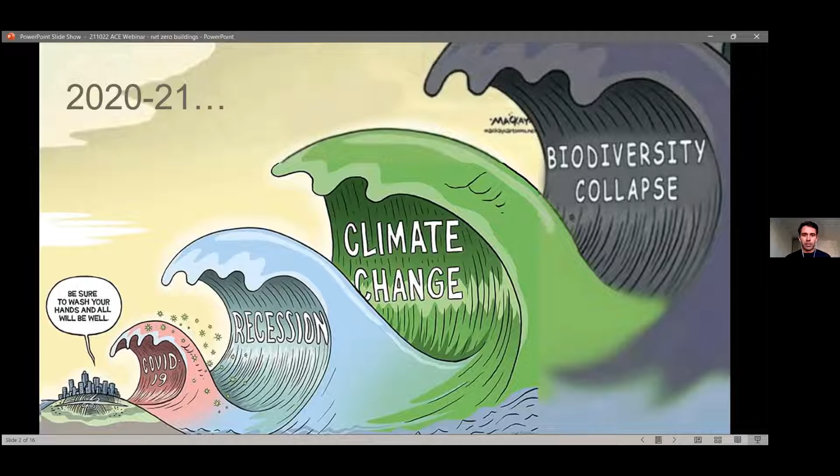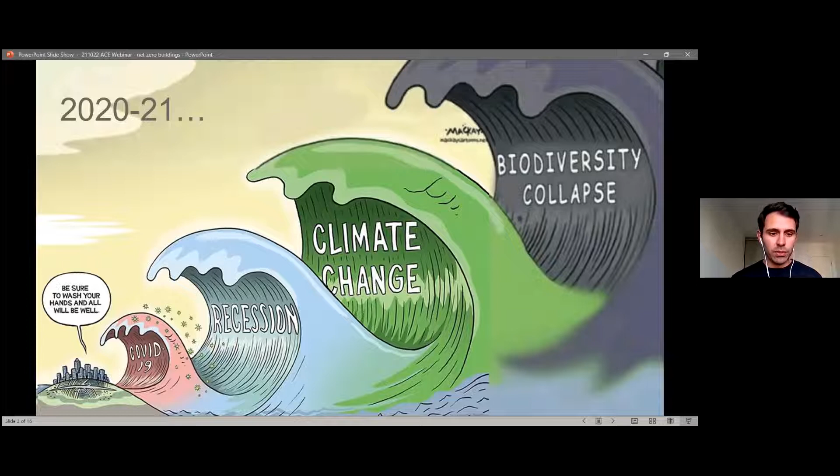Just in terms of context setting, I think this slide is really quite impactful. It shows today's context - we've all been very worried and taking rapid, worldwide action on addressing the effects of COVID-19. But similar crises lurk in the background, and the climate crisis is one of those. We need a similar level of pace and scale of action to what happened with COVID, in fact maybe even more so. There are lots of similarities we can draw from what's happened in the last 18 months to what needs to happen in addressing the climate crisis.

So exactly what needs to happen is shown on this slide. The IPCC reports have told us time and time again that we need to achieve net zero emissions by mid-century - this bottom purple line - and critically, we need to halve emissions by 2030. So within the next 7 or so years, we need to drastically reduce global greenhouse gas emissions. Currently we're tracking on an upward trajectory, looking to hit a warming scenario of greater than 4 degrees by the end of the century, which will spell disastrous effects of climate change.

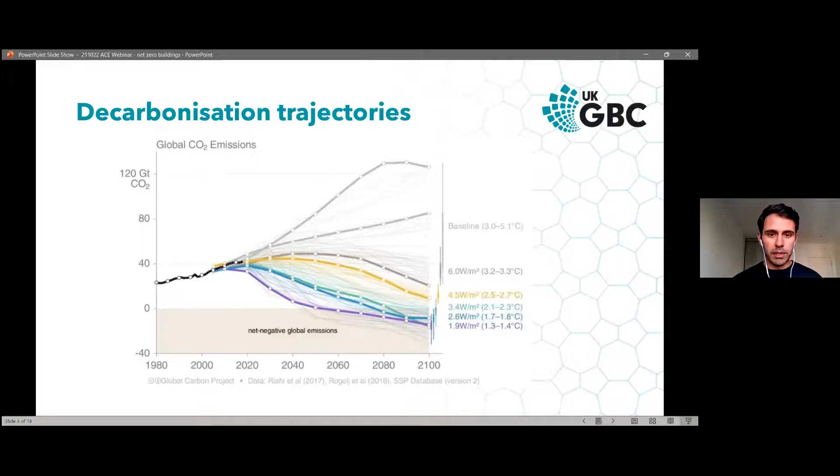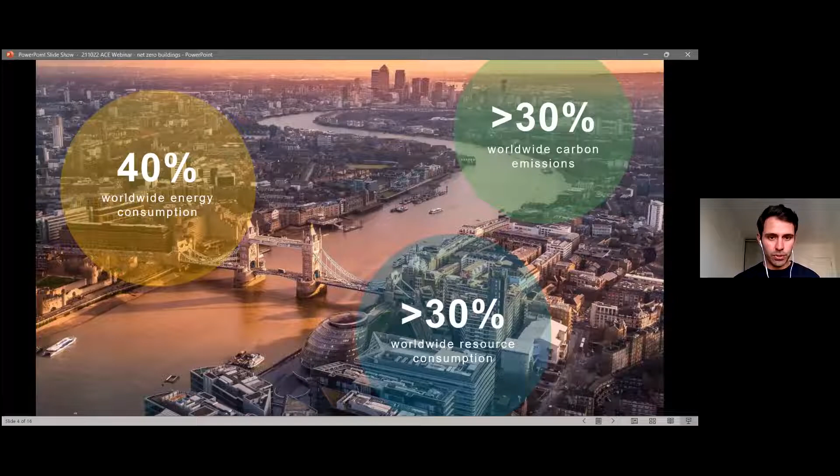Relating this to our profession in the built environment, these are some commonly used stats. In fact, the stat we like to use is that the built environment is responsible for about 40% of global greenhouse gas emissions. So there's a significant impact that the built environment has, and it's a key part of the solution in delivering against that net zero target.

Just in terms of setting that backdrop and making it relevant to the building sector, what we're doing in the Advancing Net Zero team is taking these high-level aims - taking the findings from the IPCC reports, understanding what the UK government is doing, setting a 68% reduction by 2030, which is good to see. Understanding how that relates to the property and construction sector, relating it to carbon budgets, understanding what role businesses have to play, and then how that relates to the component part of buildings.

So our work spans some of those levels - importantly the whole life carbon roadmap, which Iria mentioned and which I'm going to talk about, and then getting businesses to commit to net zero carbon buildings and also a net zero framework. So I'm going to talk about the roadmap and the framework in the next 5 or so minutes.

So the Whole Life Carbon Roadmap, we brought together a range of industry experts. UKGBC represents the entire breadth of the construction and property value chain, and we intended to produce two key outputs.

The first is a science-based trajectory to understand exactly what it's going to take from the building sector to achieve the UK's net zero target. So essentially taking the Committee on Climate Change carbon budgets, relating that to the building sector, understanding how much we have left, and then apportioning that out across the different sectors, for example understanding how much the residential sector has remaining.

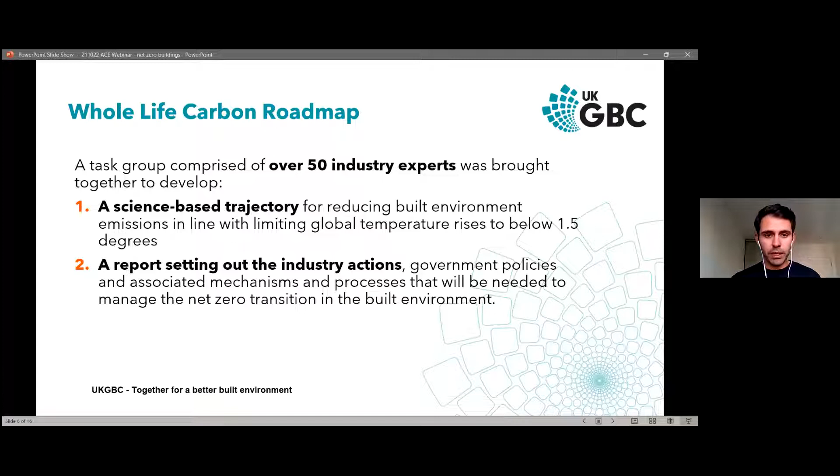Non-residential, offices, industrial, etc. Following on from that, we also know that there's going to be a steep level of reductions required from the industry. So we've set out a report which identifies the key industry actions and government policies that will be needed to ensure we're on track to delivering against those trajectories.

Just to give you a sample of what that looks like, the building sector has been reducing its overall greenhouse gas impact, but there's still some way to go. At the bottom of the chart in green, you can see the operational energy usage of domestic and non-domestic buildings. Our housing stock is the lion's share of that, so lots to do on the residential sector and importantly retrofit.

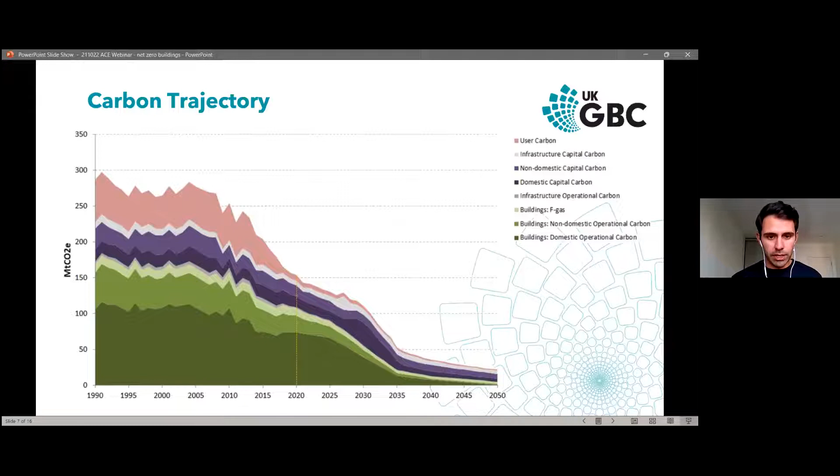Looking at infrastructure, that's a small sliver in grey. And then looking at capital carbon, which is everything to do with the embodied carbon related to the construction products and materials used in our sector, this will set out exactly what needs to happen in terms of high-level targets and how that can be related to building-level performance targets.

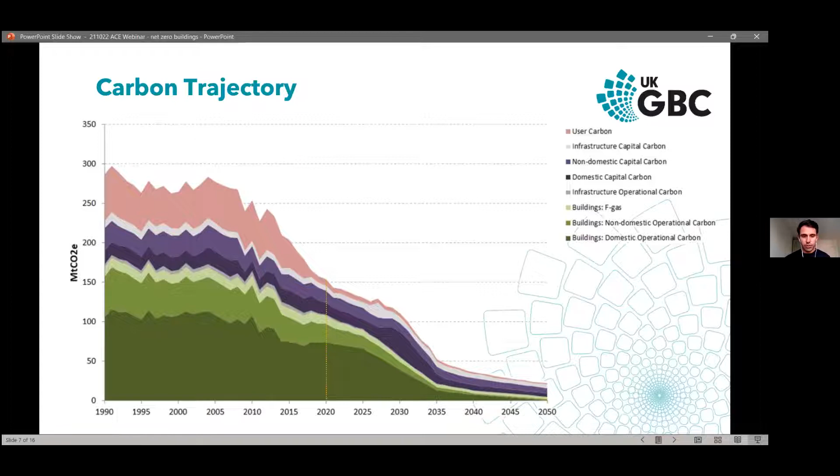And then on the actual doing part, we will have a series of policy and stakeholder action plans. This is just a snapshot of what that will look like. We have central government recommendations across a 2025 and 2030 timeframe, and then we break that down even further to make it more relevant to specific stakeholders, for example investors, developers, facilities managers, and contractors. There will be recommendations in there for building services engineers and structural engineers also.

So I've got 6 minutes on the clock. I was told we've got about 7 to 10 minutes. So I'm going to spend another 2 or 3 minutes on the net zero carbon buildings framework.

So essentially that's the roadmap, which is the sector-level trajectories and actions that need to take place. The framework definition is something we produced a couple of years ago to try and instill action today on delivering net zero carbon buildings. Essentially, there was a lot of confusion in the industry around what net zero means and how that relates to buildings.

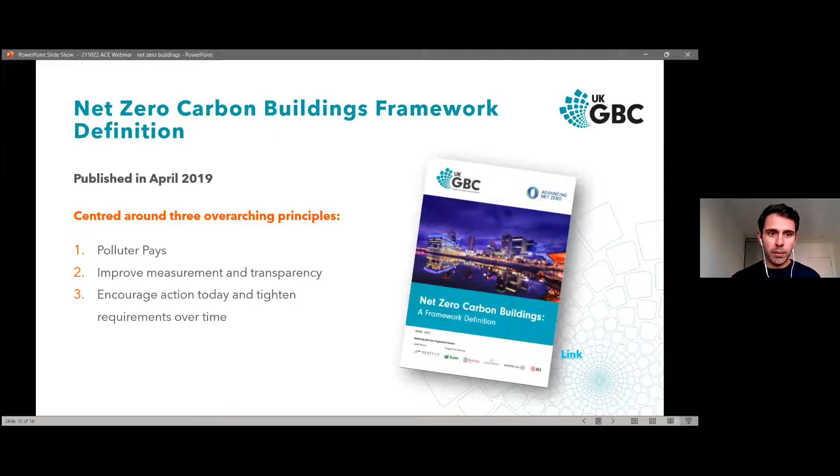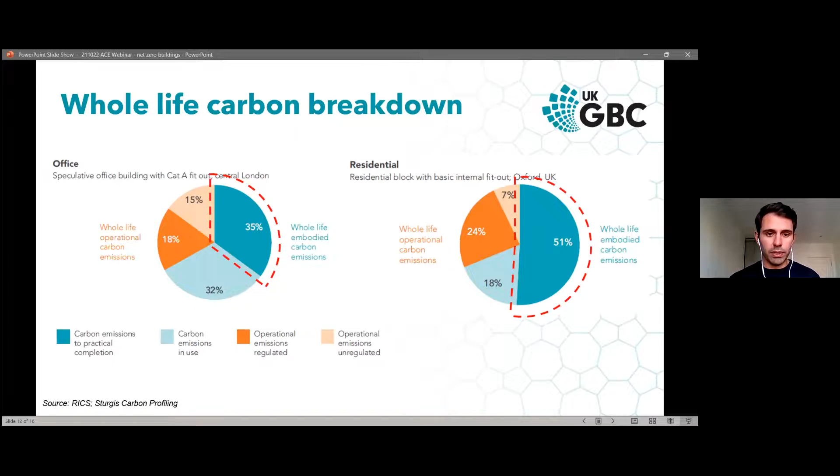We do understand that we need to move to a whole life carbon approach. However, that wasn't considered feasible or practical today. So we feel like these are the two priority scopes of carbon that we need to tackle today.

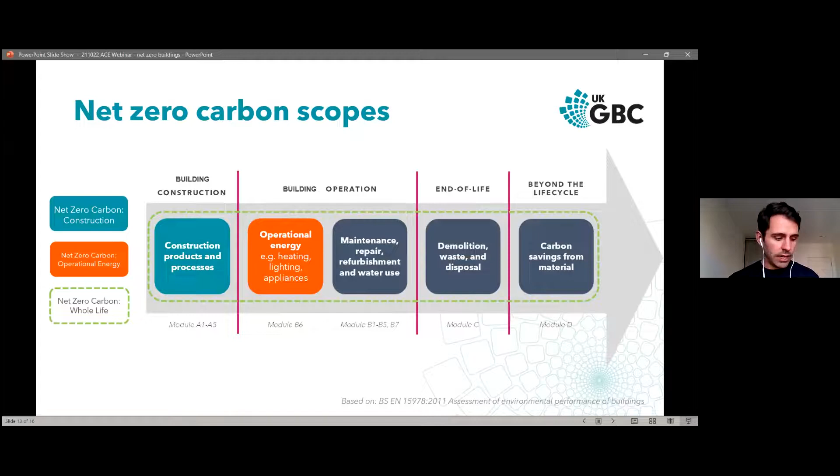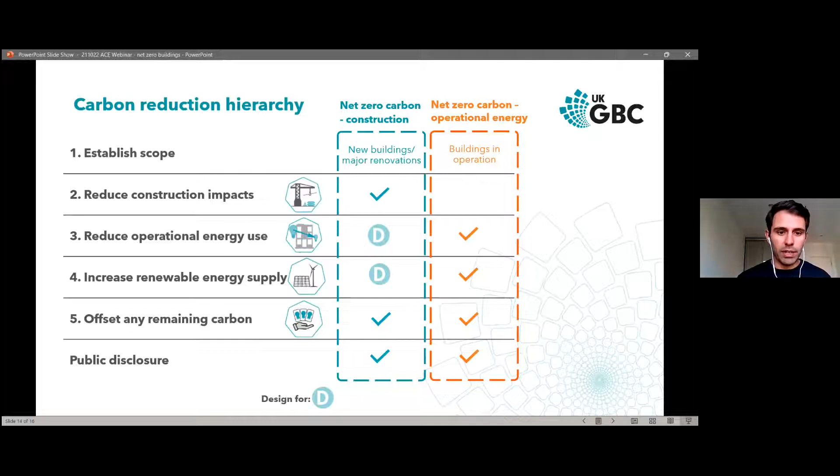And offsetting that carbon in full to achieve a net zero carbon balance. For buildings in operation, embodied carbon is less important, so the priority measure there is to reduce operational energy use, move to 100% renewable energy supply, offset any carbon if needed on a 12-month basis, and then publicly disclose against that.

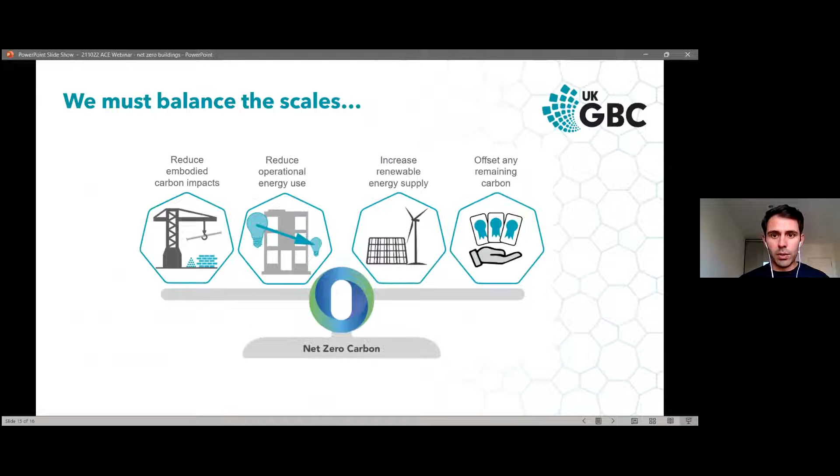In summary, this is what we need to do to achieve net zero carbon buildings. We need to reduce everything that's on the left-hand side of the scale, and we need to increase everything that's on the right-hand side of the scale, obviously with a decreasing reliance on offsets.

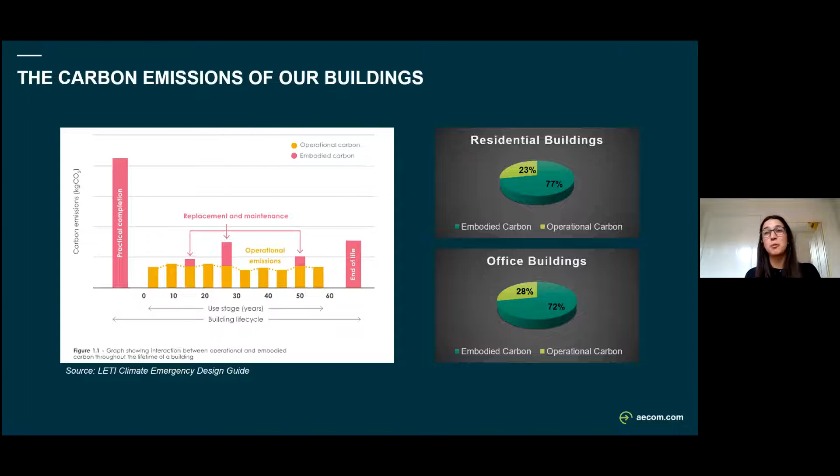So what we can actually see on this graph, which compares the embodied versus operational carbon emissions throughout the building life, is that nearly half of the carbon emissions are emitted at the very start—pretty much before the building even opens. This is all due to the actual making of the materials and the constructing of the buildings themselves.

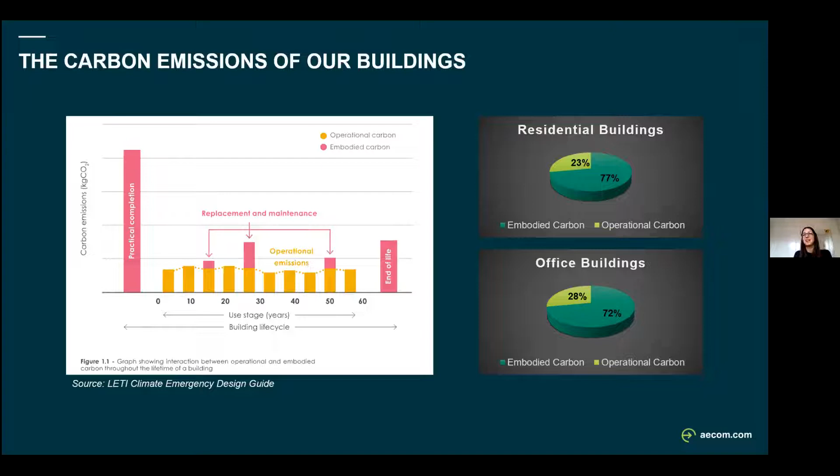This is really the big item, or the elephant in the room, which is not currently being regulated and we need to rapidly address, as Karl mentioned also. So it's a really big issue, and there's a fair few things we can do about this to start addressing it as quickly as possible.

Within AECOM, we've developed a 6-step approach to reducing the carbon implicit in our designs, starting with refurbishment. The best way to reduce the carbon emissions of new construction is to just try not to build new in the first place, and encourage saving the buildings that currently exist in the world around us.

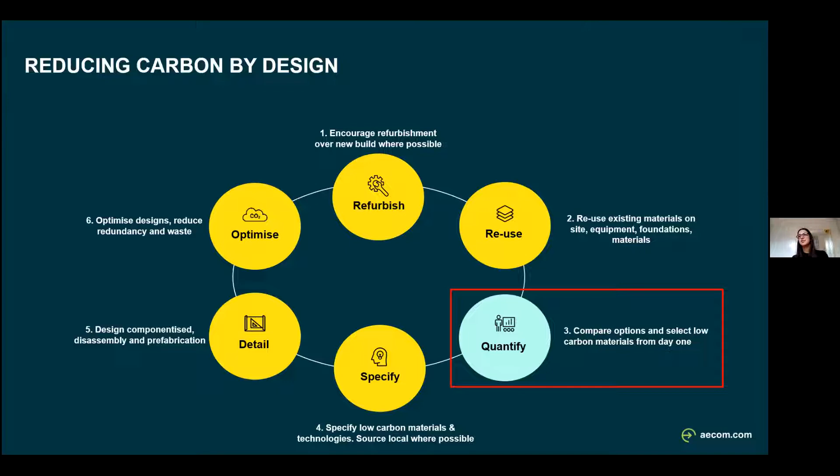Step 2 is reusing, so we're looking at encouraging reuse of as much of the existing material on site as possible. Step 3 then comes in—this is a scenario where we have to build new, when there's no other option, and this is where we're looking at estimating and calculating the embodied carbon emissions of our schemes at day one.

This is actually the significant step in the uniqueness of AECOM's approach to quantifying embodied carbon, and this is where our tool comes into place, which I'm going to talk about in just a moment in more detail.

Our step 4 is specify. So we're looking at specifying and promoting the use of low carbon materials and low carbon technologies, but also quite importantly, engaging with the supply chain early to make sure that those materials are actually going to be available when the building gets to go to site to get constructed.

Step 5 is detail. So we're looking at designing connections and element parts and components to enable them to get disassembled and reused at the end of the building life. And finally, last but not least, we're looking at optimizing our designs in an effort to reduce the material waste.

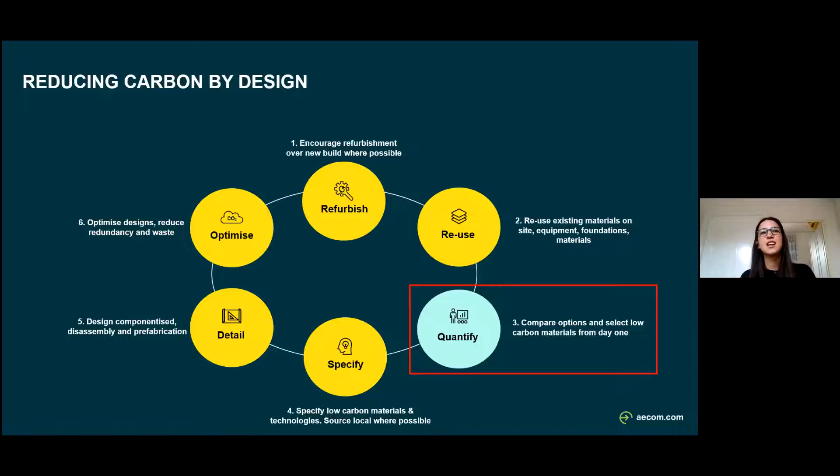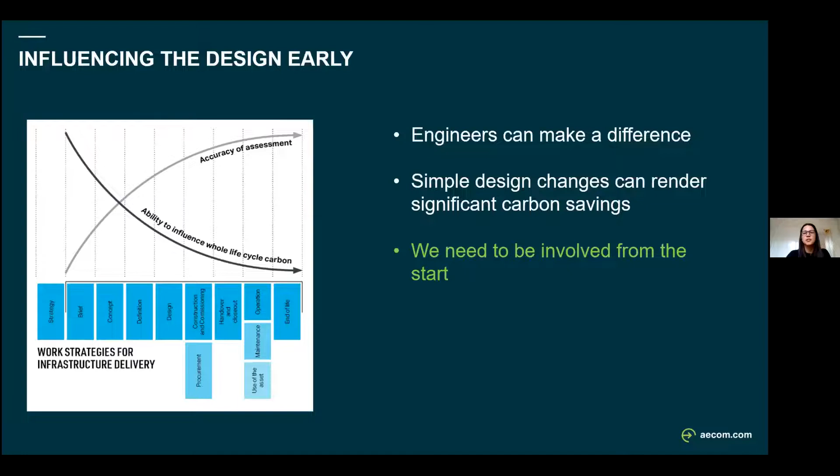Thinking of the project stages of how we work at the moment, this is currently roughly where engineers get involved. By the time we come in and sit at the table, most of the key decisions have already been made. Someone's decided whether they're going to build, what they're going to build, how big that building is going to be. Often the room layouts are decided as well. So actually, as structural engineers and mechanical engineers, it's very difficult to make any impact on the carbon footprint, because we're just trying to design our structures and services to fit within predefined constraints.

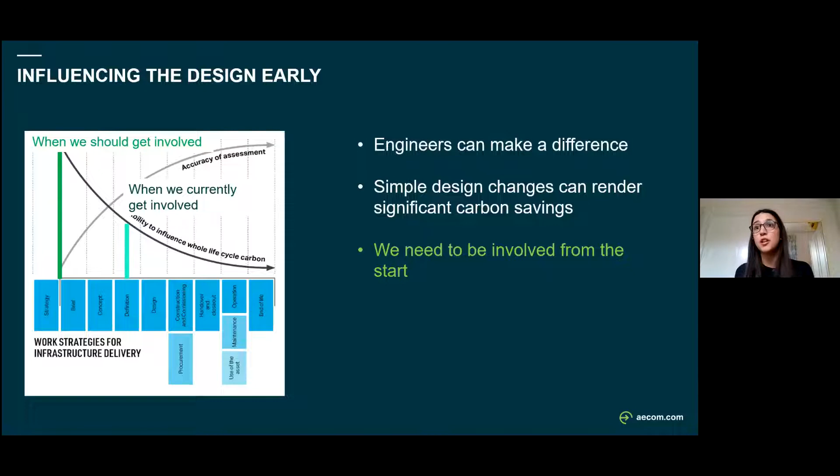So in order for us to actually make a real difference, this is where we need to get involved at the very, very early project stages, strategic briefing stages, where people are trying to decide whether the building that's on site can actually be saved, or if you need to build new, what can you build to make sure that the carbon footprint is as low as possible.

And this is actually where our embodied carbon tool comes into play. Within AECOM, we've developed our own in-house tool, which is called Eco.Zero. It's essentially an embodied carbon and cost optioneering tool. The idea is for this tool to be used exactly at those early project stages.

We're talking RIBA stages 0 and 1. The idea is that the tool can help define the building shape, the building form, can help define the size of the building and the key materials, with carbon at heart basically.

So what we do is we've collaborated across multiple disciplines, because we appreciate that we really need to look at holistic carbon assessments. We can't just focus purely on the structure. Obviously, a big element is the structure, but in addition to that, we have geotechnics, input from our own facades, architecture, and cost management team in order to offer this holistic view.

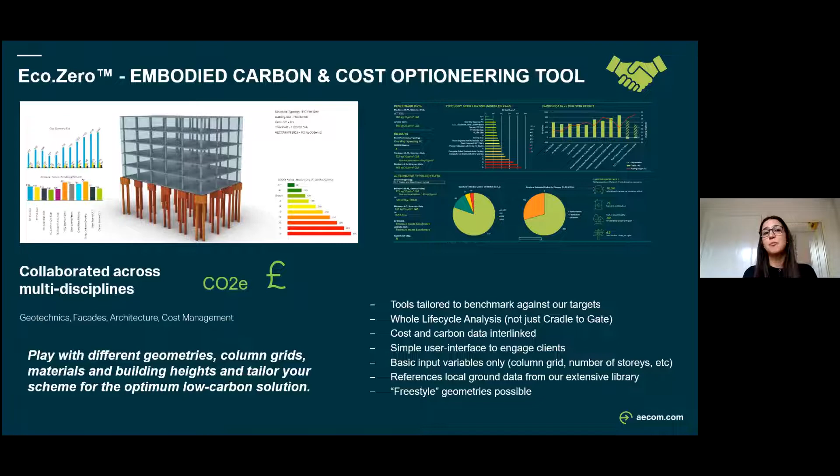The tool is currently offering at a glance carbon comparison of 11 different structural typologies. We're looking at multiple concrete options, multiple steel options, timber, and some hybrid options as well. Really the idea is that you can play with different geometries, different column grids, different materials, so that you can tailor your scheme for the most optimum carbon solution.

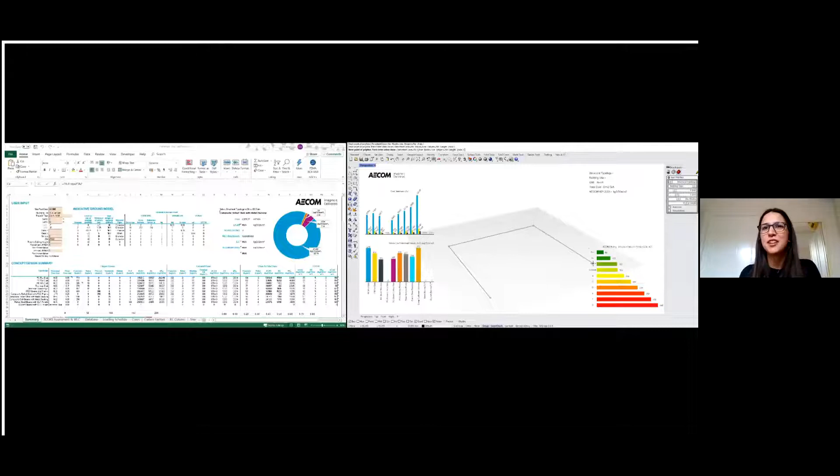Next, I've got a little video to show how the tool works in practice. Brilliant that it works. So all you need to do to get it going is draw an outline of a building, and then immediately a building pops up in front of you. The idea, as I said, is to use this as a decision maker tool to choose the best material, the best building shape.

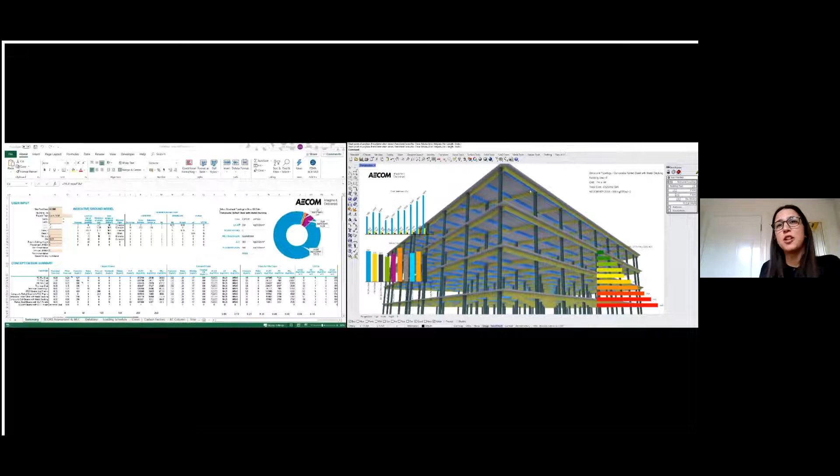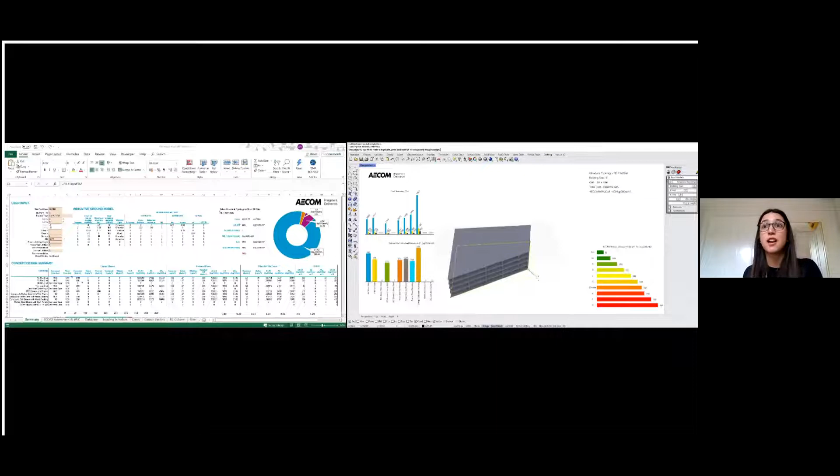What the tool does essentially, when you change some of the key metrics, you can play around between different materials. You can change the spacing between the columns, for example. Whenever you change something, the data in front of you gets updated live, as it draws information from our own extensive database. So, for example, when you change the column grids, the sizes and the slab thickness of the building change live in front of you, and the associated material tonnage and carbon also change.

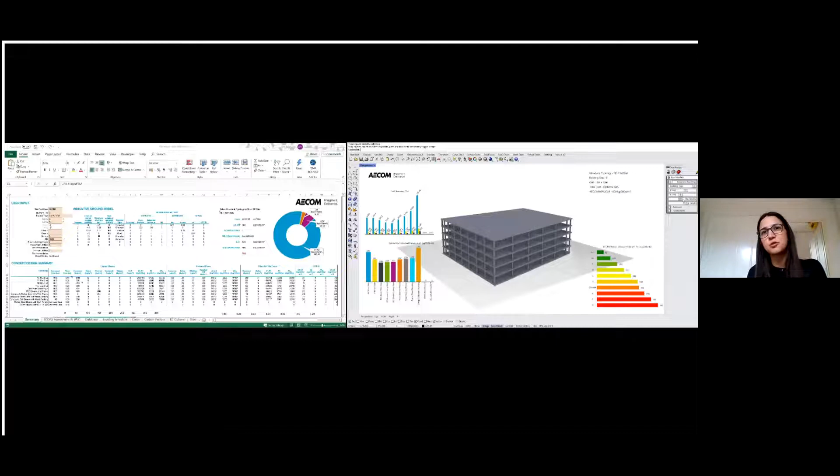You could play around with different options, add stories, subtract stories, and see what effect that has on the overall carbon and where that sits in terms of our benchmarks.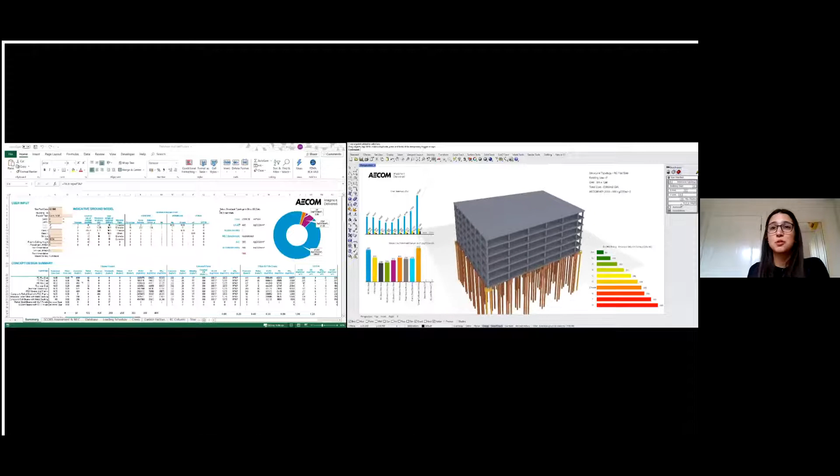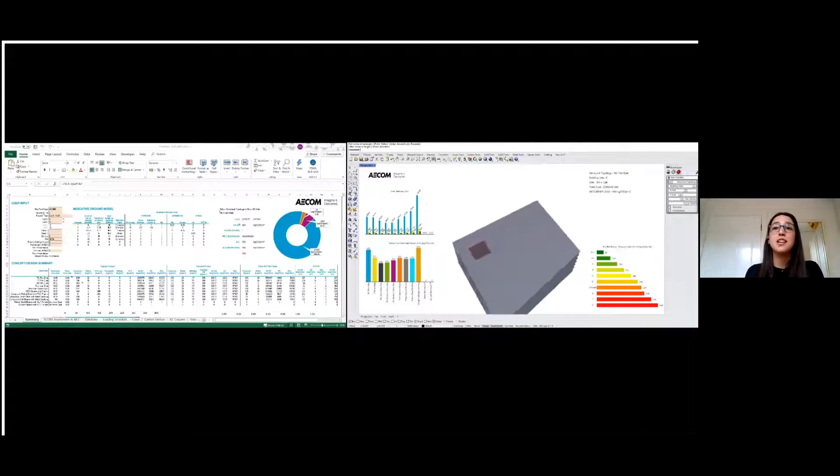As I said, we've developed this as a multidisciplinary tool as well. We are looking at foundations. For each of the 11 structural typologies, we generate a different foundation solution tailored specifically for the site we're looking at. All the input it needs is a simple ground model, which you could get from any BGS borehole logs, which exist for nearly any part of the country. So it's not too difficult to do.

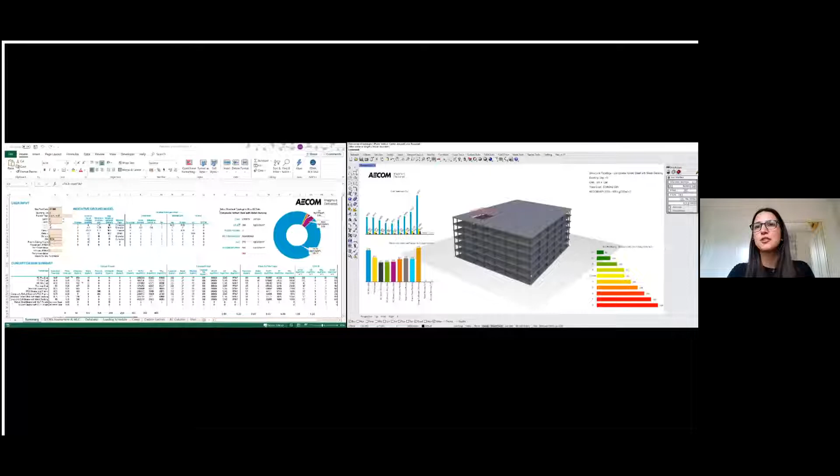So that's it on the tool. I think this is probably the end of the video, so I'm just going to move on to the next slide, conscious of time.

From using our tool, we've already started to establish some key trends and simple steps we can take to achieve low carbon construction. I've extracted some highlights here, but the list is much longer. I just don't have enough time to tell you every bit.

Some of the highlights we've got is that increasing column spacing actually results in an exponential rise in embodied carbon. So we're trying to promote using regular grids and closer column spacings.

Another interesting study we did a couple of months ago was on structure versus facade carbon. This is essentially a study we did to try and highlight the importance of doing holistic assessments. Because sometimes if you do an embodied carbon assessment purely looking at the structure, almost always the timber option is going to come out as the winner.

But something people sometimes don't appreciate is that the cost of using timber is mostly that it comes at deeper sections, which ends up increasing the depth of the structural zone.

So if you look at a longer spanning solution in a multi-story building, the little bit extra you get at every floor when compared against a concrete solution could amount to quite a lot. So if you compare the different overall building heights between a concrete solution and a timber solution, it could be a difference of a few meters, which is not insignificant at all.

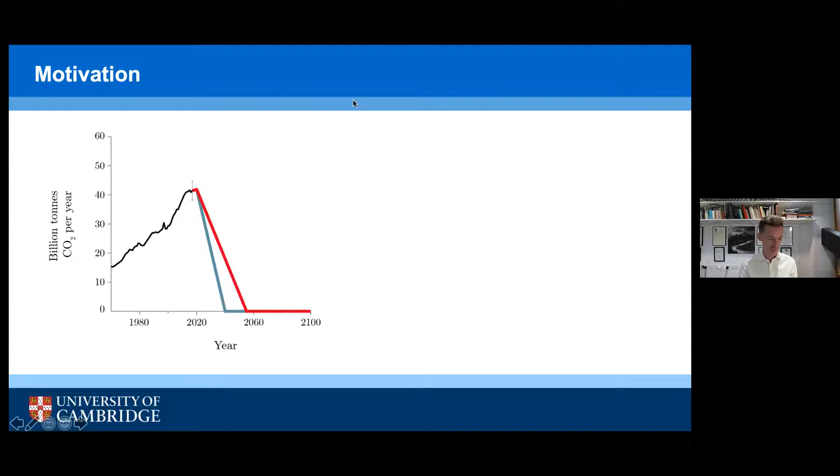I just wanted to show one graph to recap essentially what Karl said, to highlight why this is important. This is CO2 emissions globally from 1970 to 2020. The red and blue lines are the projections from the IPCC that will give us a chance of getting to 1.5 degrees warming. So we've all been educated and worked on that upslope. Whilst there are very good examples of low carbon design, generally speaking, CO2 emissions have been going up.

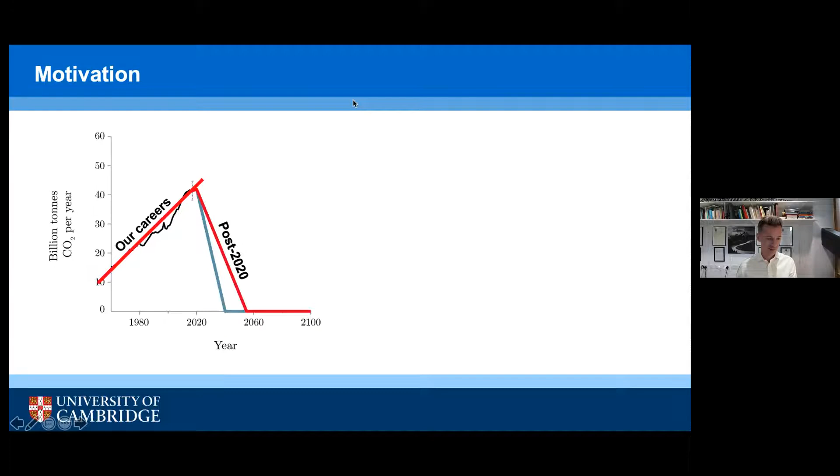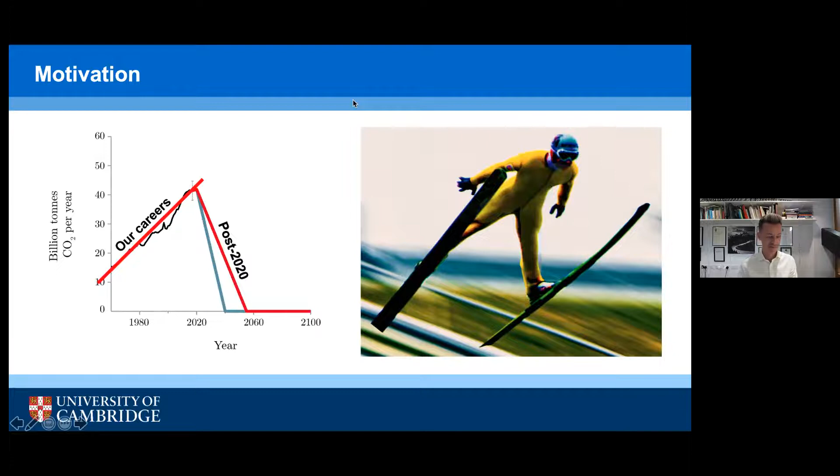On that graph, for me, it's like a bit of a ski jump leaping off after 2020. It's a pretty big challenge is really what this graph is telling us. What we're going to look at in a few moments is changing completely the way that we design things. I think the previous practices we've had have demonstrably not been good for the climate. So although that looks like a very scary slide, we need to reduce our emissions every year between now and 2050. I think it's a really big opportunity for us to do things in a much better way. So it's an exciting time rather than being a really terrifying time.

So our motivation, in response to that challenge, is really to think differently about how we use materials in construction. Do we know how much material we need? Does it perform as we expected it to? And as we start to change our practices, do unexpected things happen? And then how do we deal with that?

In our hierarchy of things to do as we move towards net zero, using less stuff is the first thing to do. So just use less. You can then deal with your specifications, and very much the last thing is you can offset, and offset appropriately. Offsetting is not the answer. Using less stuff is the answer.

So every sector of our economy has to change, of course. This is not just construction, it's everybody. So we all have a responsibility.

Really what we're going to talk about here is the importance of measuring what's going on. If we want to use less material, we really need to know how our structures are performing. So from a structural engineering perspective, we want to know things about serviceability performance, ultimate limit state performance. And from a carbon perspective, we really want to know what's in our building.

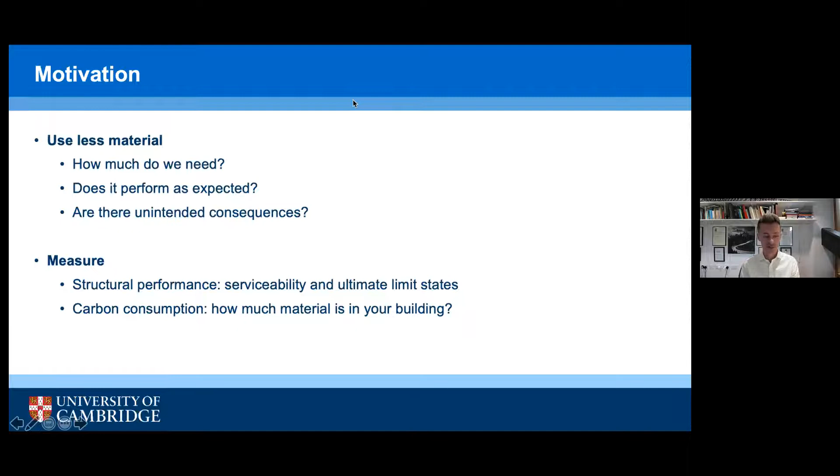Even something as simple as that is still relatively unknown. So if we first look at structural design behavior, this is a picture of a beam that was tested at the University of Toronto back in 2015. It's a 19-meter span beam, 4 meters deep.

What they did, which was very important, is they sent all these details around to anybody in the world who wanted to see it. Before they ran the test, they asked for predictions of how this beam would fail. It's a simply supported beam—this is very basic structure. What point load would cause failure?

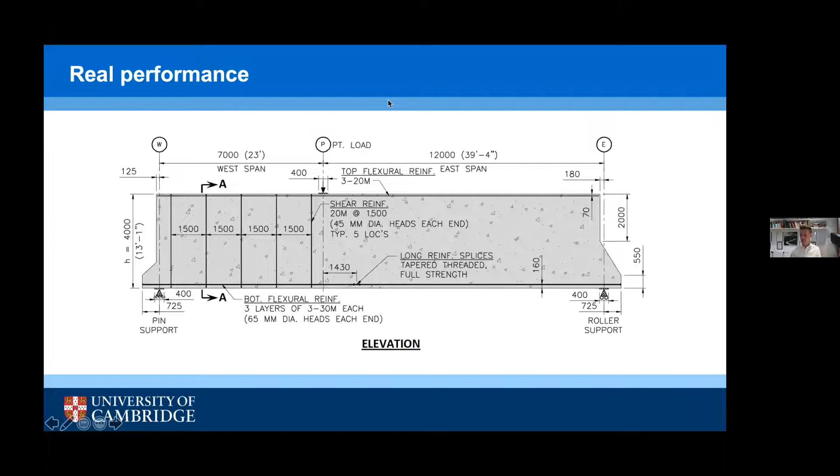The reason I'm putting this up here is a simply supported beam of this size is unusual in a testing environment—we don't often test beams this big, but it's not unusual in real life. So if we can't actually accurately assess or predict the capacity of a structure of this scale, then how on earth can we be confident about how things are working when we build them?

So one response might be, well, let's just be very conservative and use material as our risk mitigation. Unfortunately, that's not compatible with climate change. We can't do that. So we need to know how buildings work, how structures work, and then improve our design practice as a response to that.

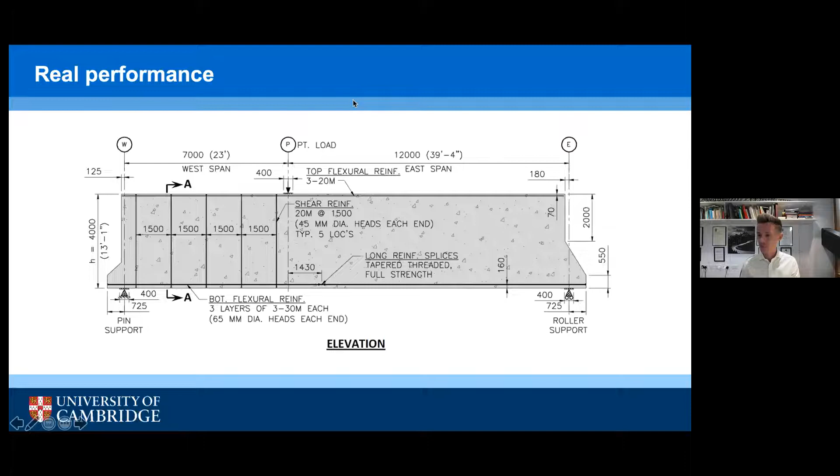So let's be honest about what we don't know and stop pretending that we know everything. So that's the structural side.

And then on the carbon side, we still have relatively little data about how much embodied carbon is in buildings. This is just one example from a US database of commercial offices. We've got 500 commercial structures here, and you can see the range is quite big. We've got a median of about 400, but all the way up to 2,700 kilos per square meter.

So when we come to look at embodied carbon, we really need to know what does good look like, what is the best practice in this field. And that really requires us all, either individually or as companies, to start sharing our information—sharing your design, sharing your carbon assessments, making sure we've measured in the same way.

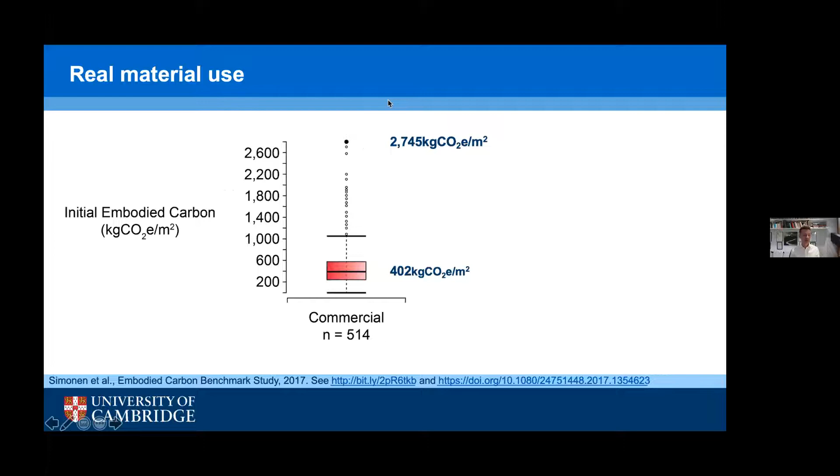This is a key point with embodied carbon. You can measure it in all sorts of different ways, and you can get all sorts of different numbers. Ultimately, for me, it doesn't really matter which method we choose, so long as we all choose the same one and then compare across companies, across sectors.

And it's only through doing that we're going to be able to learn at the speed that we need to learn to deal with the climate emergency.

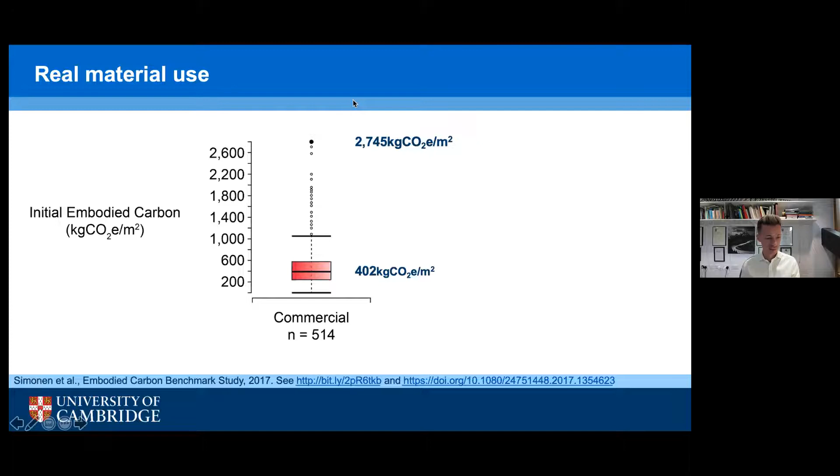And so what this really, for me, comes down to is just a quote from a nice poem, really to embrace the idea about getting things wrong. And that's something that's really foreign to many people—getting things wrong is viewed as being a bad thing.

But as you make mistakes, as you have an error, you learn something. And as you make more mistakes, you learn more and more. So this is the quote here. We need to get onto that road of understanding how things really work, where the carbon really is, and collectively move towards a lower carbon design.

So what that means is this virtuous circle of designing, analyzing, building, measuring, and improving.

The reality of most design is you send your drawings off, the building's constructed, and you never go back and check, is my finite element model actually correct? Because first of all you probably won't be paid for it, but also you don't perhaps want to know if your model was correct. But if we can close that loop, we have a better chance of improving our design practice. And then in the center of our circle, we've got those three key things: zero carbon, resilience for infrastructure and buildings, and being resource efficient.

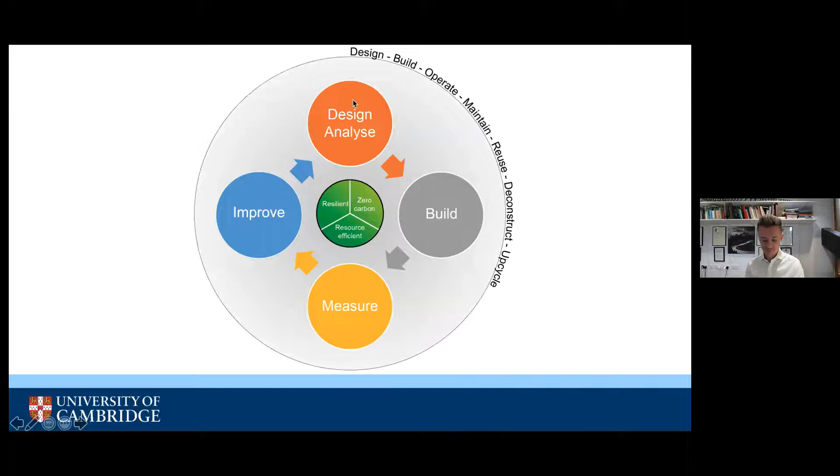So this is quite a significant change. But if you think back to that ski slope jump, this is the kind of change that we need. So one of the key things as an immediate step, as you start to use less material, is that you might start worrying about serviceability.

So there's lots of interesting work going on in this field. And I just thought I'd put up the VSimulators project, which is Bath and Exeter universities.

So what often happens is we start to change the stiffness of structures and we don't know how they interact with the humans inside them. So it's really important, as we go on that road towards lower carbon, that we ensure we're addressing all the potential impacts of changing the way we design structures.

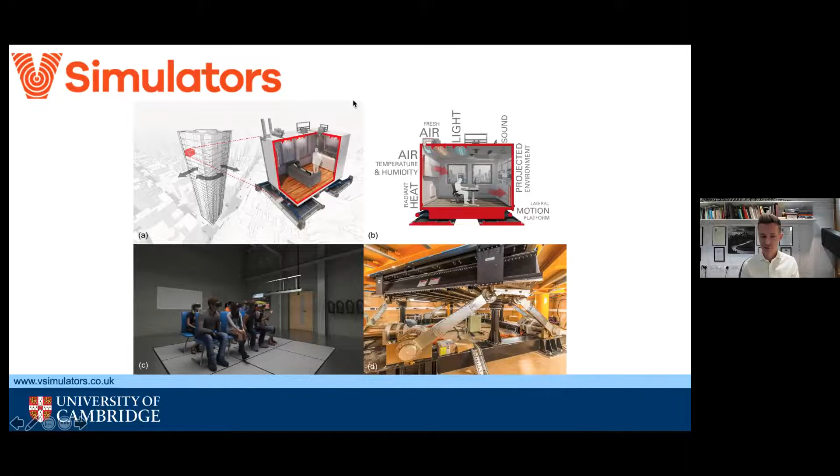So what this does is it allows us to assess the human-structure interaction of a lightweight, slender building, and ensure that they are still fit for purpose. So it's a much more sophisticated way of design.

So that's me. Thank you.